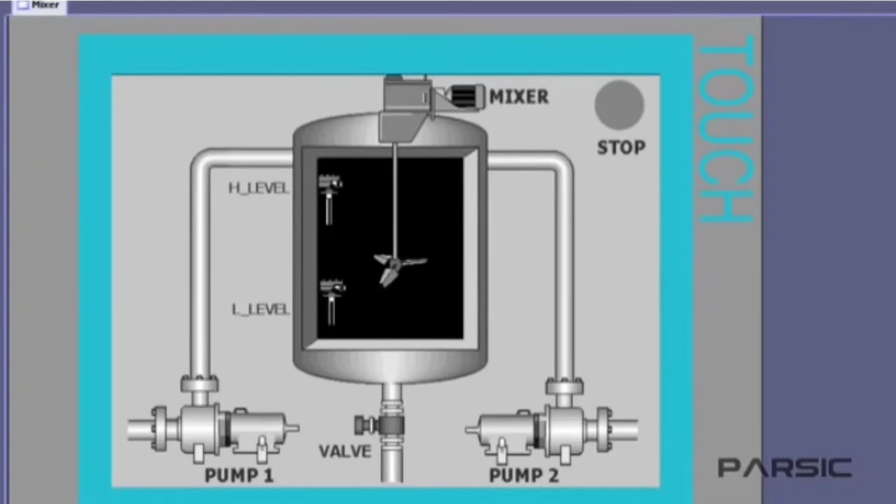In this lesson, we will learn how to write a PLC program for the machine illustrated here by using an S7-300 PLC and Step 7 software.

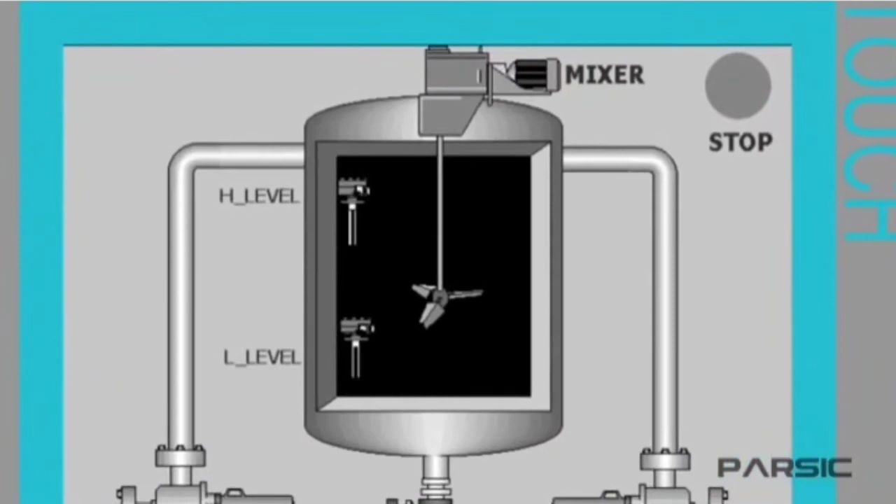As you can see, we have two pumps which are being used to transfer two separate liquids into this tank. Inside the tank, there are two level switches installed in the lower and upper parts of the tank respectively. The switches are digital, which means that they can only ever be in one of two states, true or false.

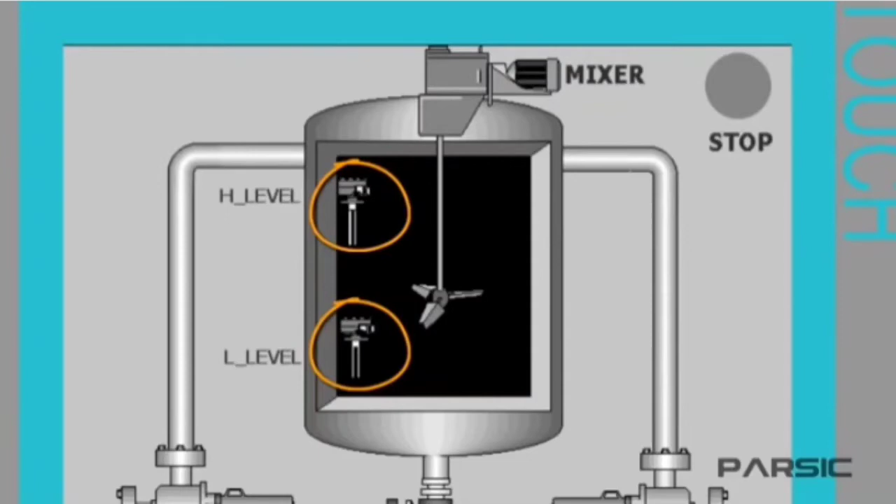There is also an electrically powered mixer inside the tank, which starts working for a defined period of time, mixing the two liquids together after the tank is filled. We also have a discharge valve in the bottom of the tank, which controls the draining of the liquid from the tank.

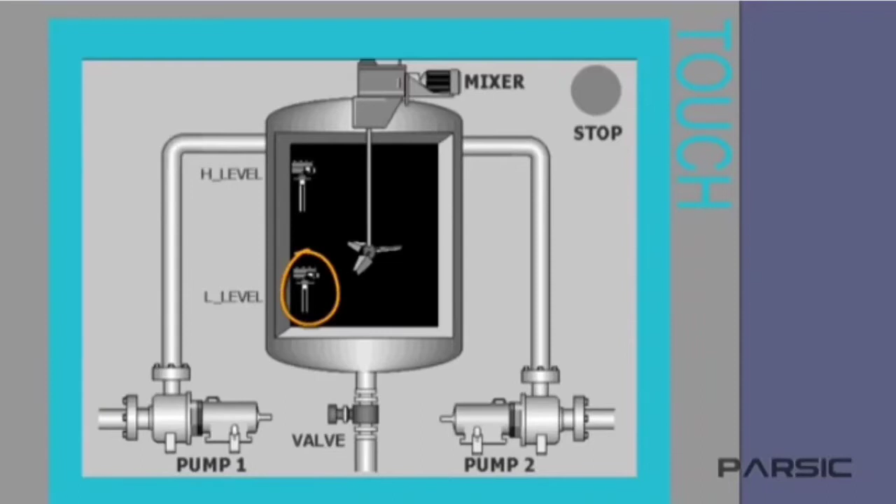Okay, now let's see what the program should do. This lower level switch has an open contact inside it. When the level of the liquid drops to the level of the switch's position, the contact closes, sending a 24-volt DC signal to the PLC input.

We want to write the program so that when the level of the liquid reaches this minimum, the pumps will be activated and begin filling the tank with the liquids. The pumps continue filling the tank until the level reaches its maximum at the higher level switch. When this happens, the open contacts in the switch will be closed, and another 24-volt signal will be sent to the PLC input, telling us that the tank is full.

When this signal has been sent, first, the pumps should shut down so that no more liquid enters the tank, and then this mixer should be turned on. We want the mixer to operate for 7 seconds, mixing the liquids that have been pumped into the tank. After 7 seconds, the mixer should automatically shut down, and this discharge valve should open.

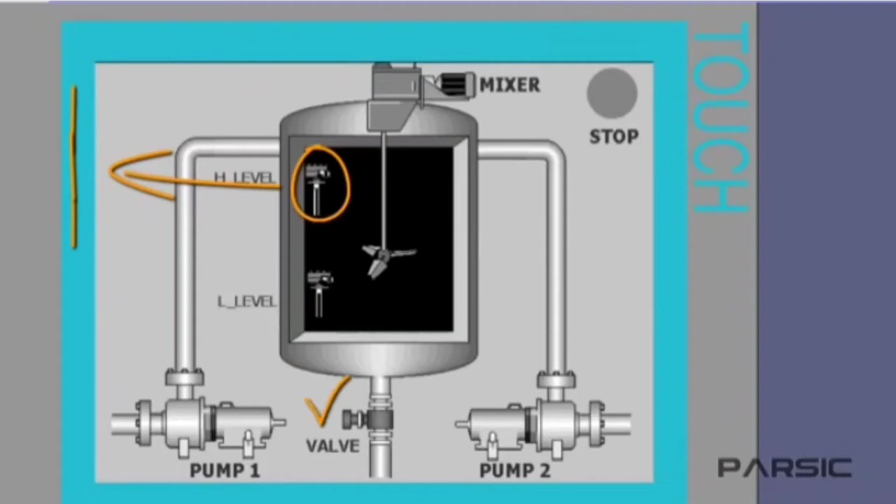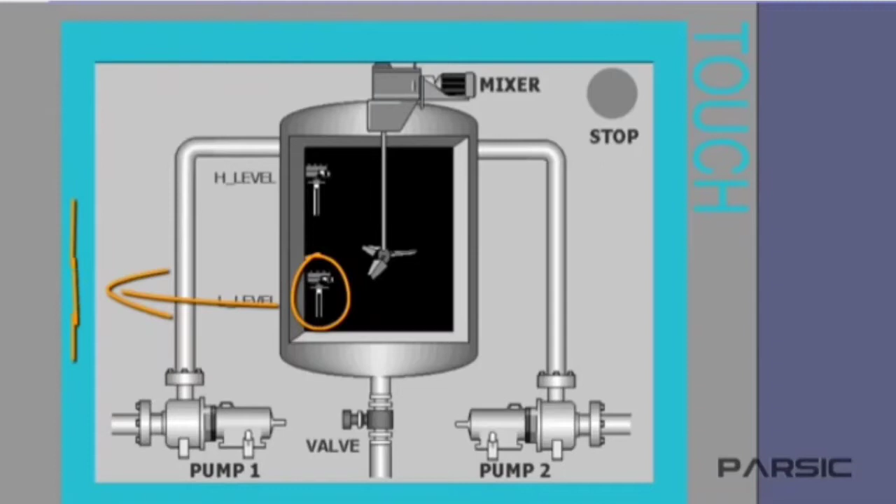With the valve open, the liquid will be discharged from the tank and transferred to another location within the factory to be processed. When the level of the liquid in the tank drops to the minimum set level of the lower switch, the switch contacts will close again, thus starting a repeat of the cycle.

Okay, so now we need to click on the SIMATIC Manager desktop icon in order to start writing the program. SIMATIC Manager is a program which manages sub-programs of Step 7. To start our programming, first, we need to create a new project by clicking on the New icon on the toolbar to open the New Project window.

In this window, we enter a name for our project in the Name field. We'll call this project Mixer and enter it here. The path to our saved project is shown in the storage location. However, we can use the Browse button to navigate to a different location other than the default.

Okay, after creating the project, we click on its name to highlight it. Then, from the Insert menu, we select one of these stations, dependent upon the control system that we intend to use. As we discussed previously, we will be using an S7-300 PLC to control our machine. So, we need to select the second option shown here, which is Station 300.

After selecting this option, we see that a subgroup named SIMATIC 300 has been added to our project. Next, we click on this Hardware icon, which takes us to the hardware so that we can configure the modules we need for the PLC. Our PLC is an S7-300. So we need to select the relevant modules from the SIMATIC 300 subgroup here.

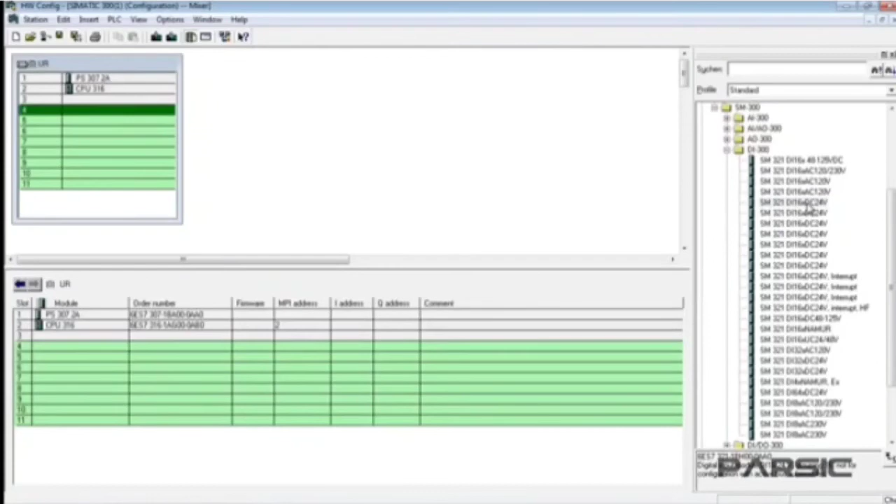However, as you can see, after doing this, we get a message that this module can only be inserted into slots 4 through 11. So we need to leave the third slot empty, select the fourth slot, and then double-click on the module again to insert it into the rack. Now, we can also insert the digital output module by opening the DO300 here. Double-click on this module to insert a 24-volt 16 output module.

Okay, the addresses of the digital input module range from byte 0 to byte number 1, which means that the addresses we can use in this module for our program start at I0.0 for the first input and continue through to I1.7 for the last input. This gives us 16 digital inputs.

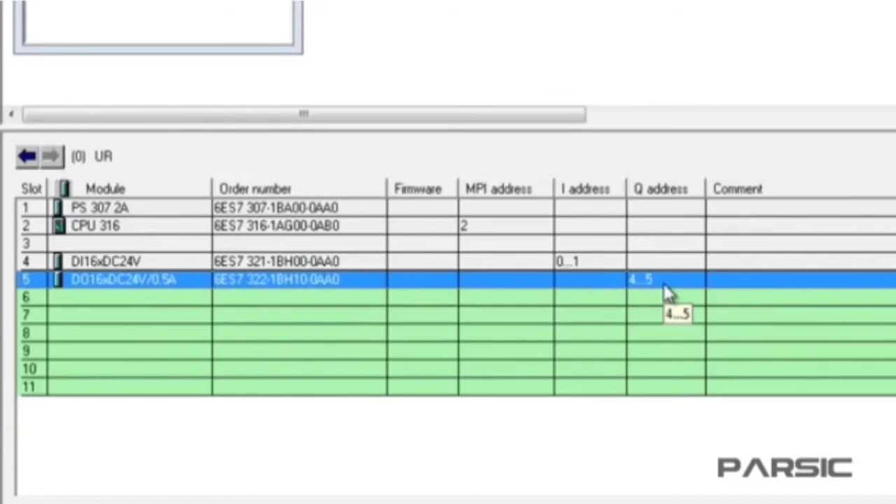Similarly, as you can see, the addresses of our digital output module range from byte number 4 through to byte number 5, so there are 16 addresses that we can use for this module, starting at Q4.0, continuing through to Q5.7. Okay, so now the configuration is complete, and we can download it to the PLC.

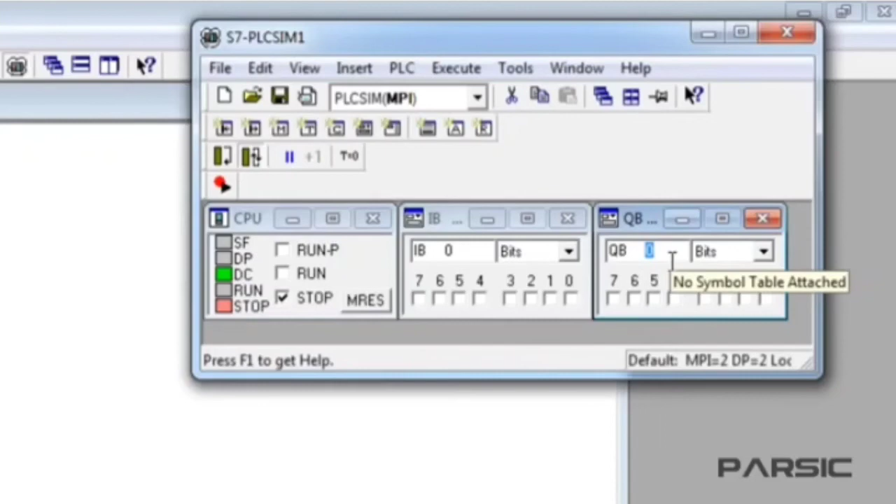We will use a simulator to test the program, so we need to click on this Simulator On-Off icon in the SIMATIC environment in order to run the simulator program. Now, we go to the Insert menu and select Input Variable so that we can insert an input variable. Similarly, we can select Output Variable, but as the address of our output module starts from byte number 4, we need to change this 0 to a 4.

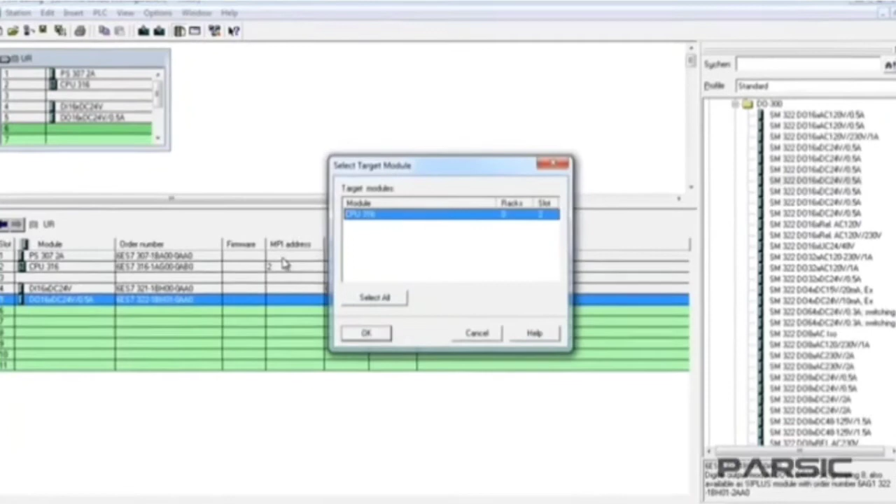Before downloading the configuration, first click on the Save and Compile icon to save it. Then, we click on this Download icon. This brings up a window where we need to select the CPU to which we want to download the configuration, and then click OK. In the next window, click on View, and then select the appropriate MPI address. And after clicking OK, the configuration will download to the CPU.

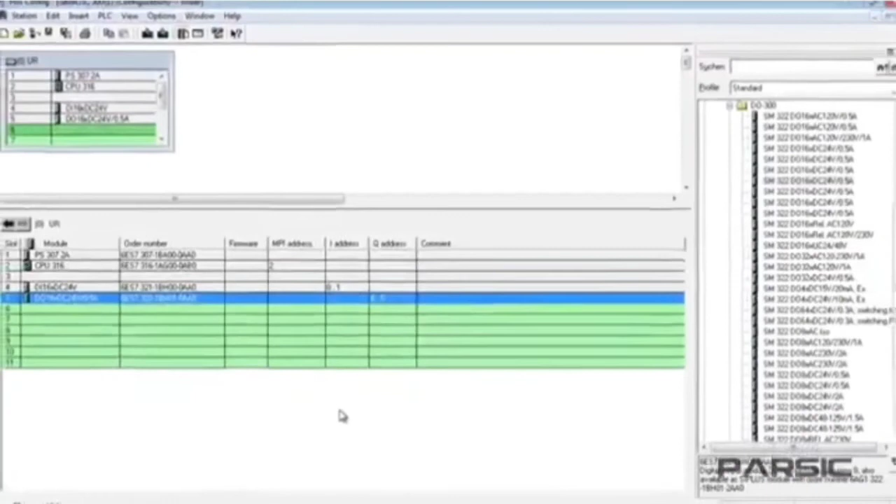Now, having completed the configuration, we can check the project tree and see that a subgroup with the same name as the CPU has been added there. Now, we can write our program in a block named OB1. We can find the OB1 by opening the S7 program folder and looking in the block folder.

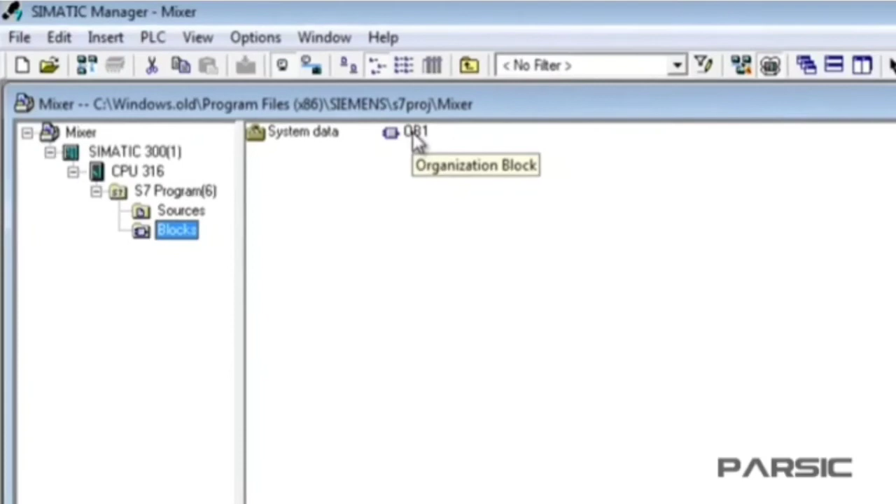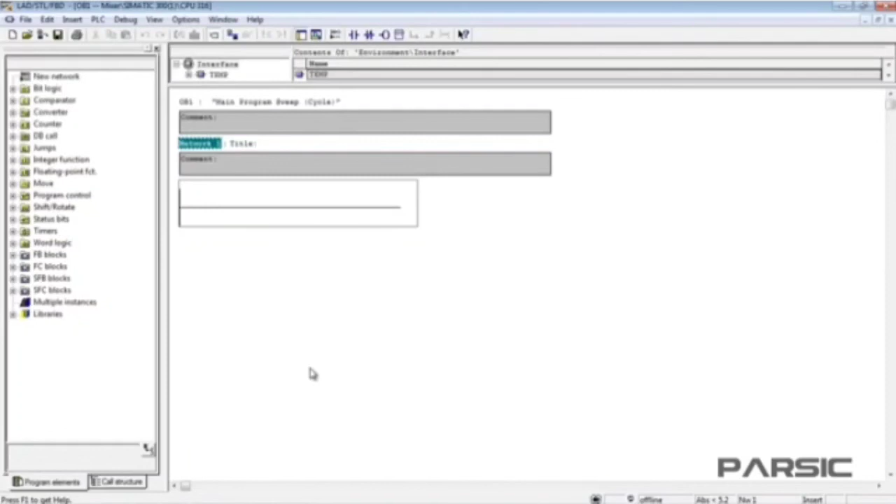Okay, now we open the OB1 by double-clicking on it. As it's the first time we've opened it, this Properties window opens. We simply OK the window to get into the programming environment. So far, we've learned how to make some basic settings and organize the environment so that we can start programming. In the next lesson, we'll learn how to write a program using simple and practical instructions that will control our